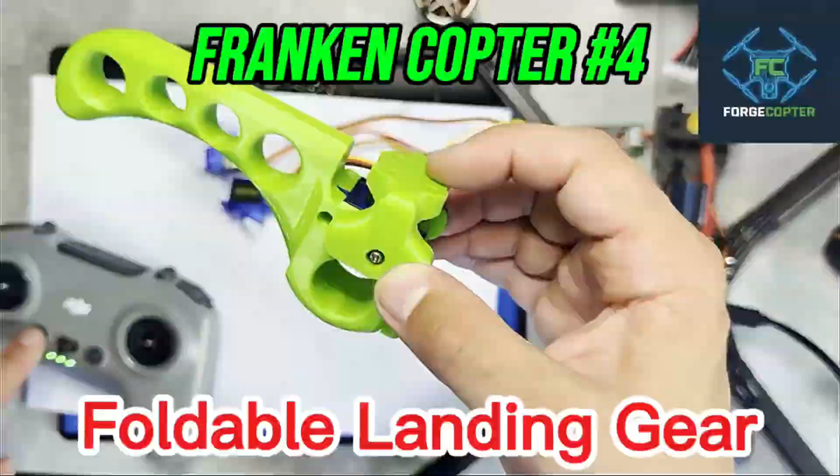I've already shown you how I assemble the drone, how I fought to get it set up, and I got it set up. Today, I want to show you how, from an innocent little project, we move further, because the need to print ordinary landing legs for the drone turned into a project worthy of ForgeCopter.

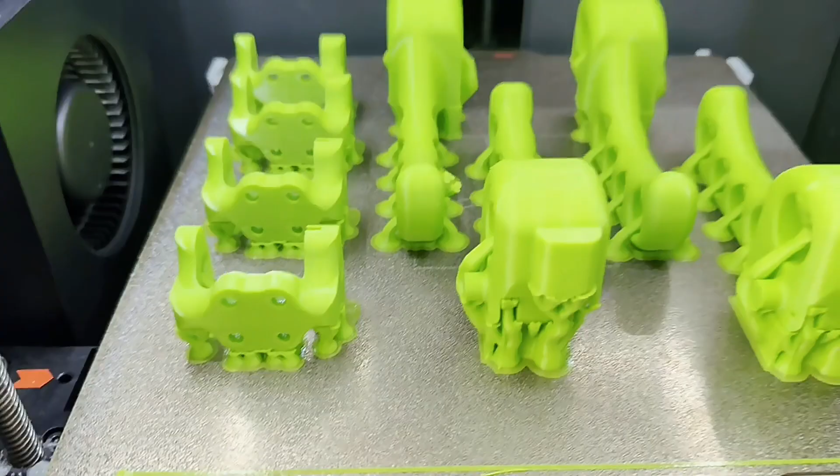Welcome to the video. I'm assembling the first legs. Even then, I had mixed feelings about them. They looked okay, but something felt off, too delicate, too temporary, and I was right.

While tuning the PIDs, I simply broke them. The drone is shaking, the legs take the force, and the plastic says bye-bye. Classic story. I had to do something about it.

I start looking for ready-made solutions. Google, checking images, but they're all the same cookie-cutter stuff. 3D model platforms, but those models are for much smaller drones. Wood legs, I dig through dozens of projects. Seem cool, but it's like something from a racing drone, not from a machine that's supposed to actually work in the field. Nothing fits the Franken-copter.

The conclusion was simple. Since I didn't find anything worthy, I'll design them myself. I open SolidWorks. I start drawing.

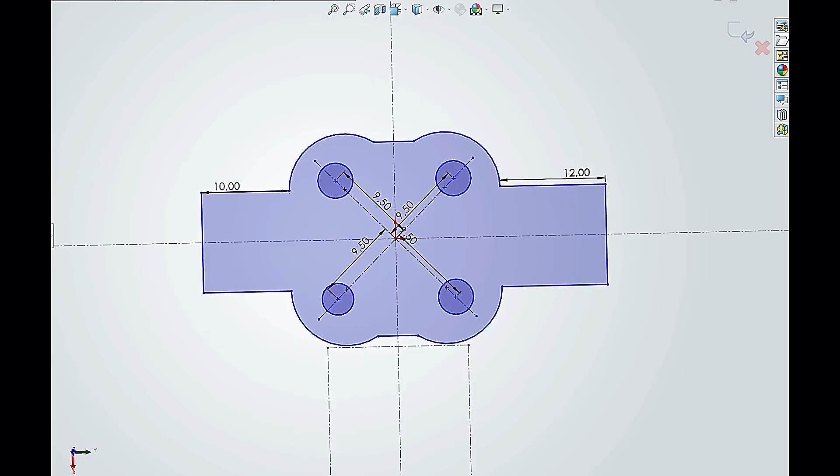The first versions were, to put it mildly, mediocre, too complicated, too heavy, or just plain stupid. After a few attempts, it suddenly clicked. Since this is FrankenCopter, the legs can't just be ordinary blocks. They have to fold and unfold by themselves.

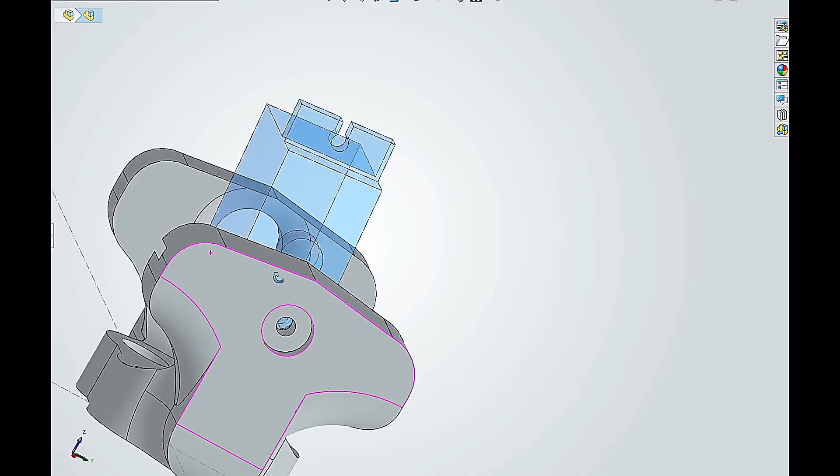Decision made: servos. In the cupboard lay some old SG90s from other projects. They're pretty weak, that's a fact, but they're light. They should manage. On top of that, I designed the legs so that even in the folded position, it already builds ground clearance.

So I don't always have to unfold them. Sometimes it's enough that they simply are there. Folded clearance is about 5 centimeters. Unfolded, 13 centimeters, exactly as much as needed.

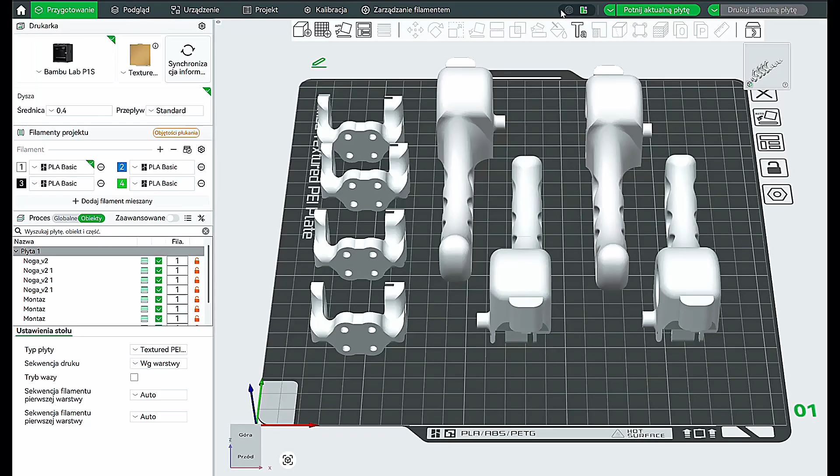The models go into the slicer. I set everything up, generate the G-code, and an 11-hour print begins.

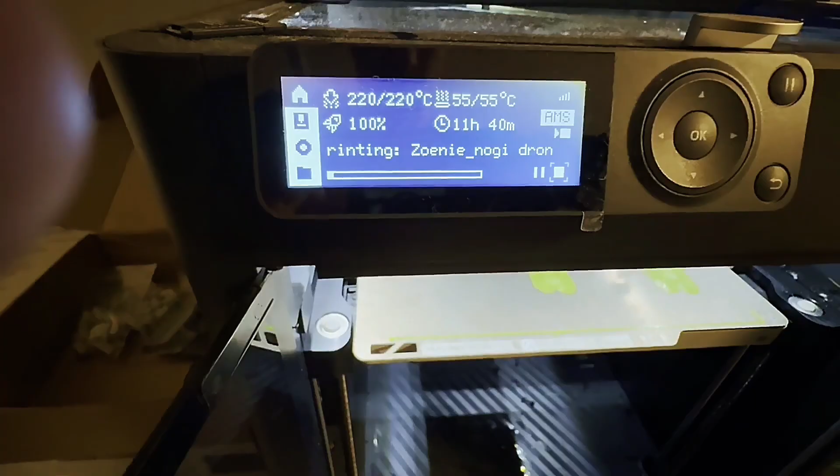The first layer looks good, so I leave the machine and go to sleep. In the morning, I get up, there's still over 2 hours left. I must wait. The print finally finished. No errors visible at first glance, so time to get to work.

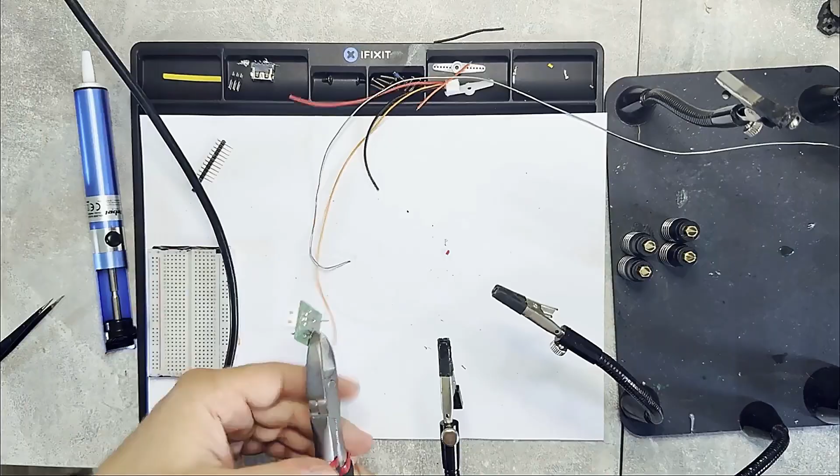This started by assembling the hardware. All of this had to be soldered somehow. At first, I wanted to mount the servos directly on the flight controller, but that's not the best solution, because servos need current right from the start, and a flight controller usually only has 2, maybe 3 amps on its 5-volt pads.

So I started building a setup that allows connecting the servos and power from a separate power supply. I had a few power supplies, but unfortunately from Chinese manufacturers, so it was hard to judge their efficiency. Unfortunately, I was stuck doing the work without a predictable outcome.

On top of that, the concept kept changing. First, I wanted each servo to have its own signal wire. Then I realized that one signal cable to the FC is enough, because the servos will open the same way.

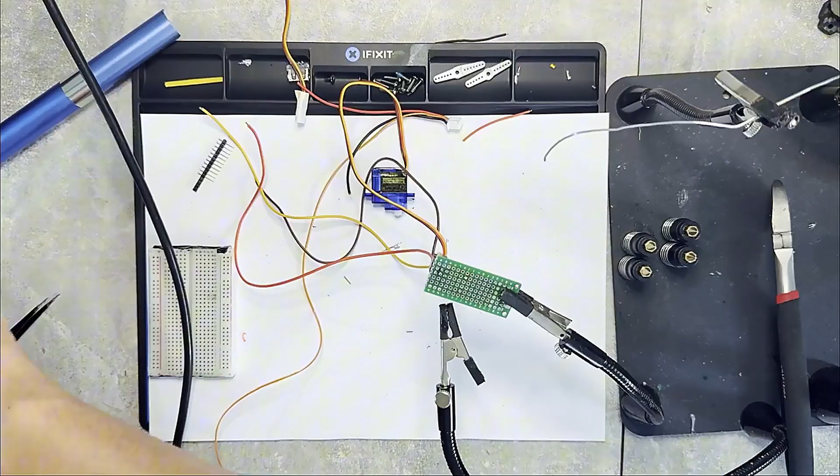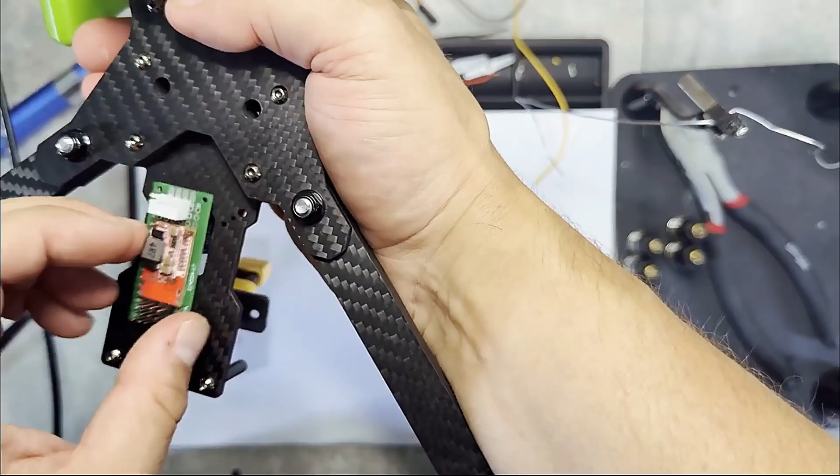I wanted to do everything professionally with connectors, after all, YouTube is watching. But connectors add weight. On normal drones, let's say under 7 inches, that can be a problem. But the bigger the drone, the less of an issue weight becomes, because the batteries themselves often allow flights over 30 minutes, and that's already a solid result. My motors are strong enough that 100 or 200 grams difference doesn't matter to them.

I treat the Franken-copter as a prototype drone. It has to fly, but I care about its modularity, so it can be a base showing that you can build drones based on ArduPilot, where the drone is meant to be more useful than just doing tricks for fun.

That's what Betaflight is for. As you can see, it's roughly soldered. Time to check if it works before I mount it.

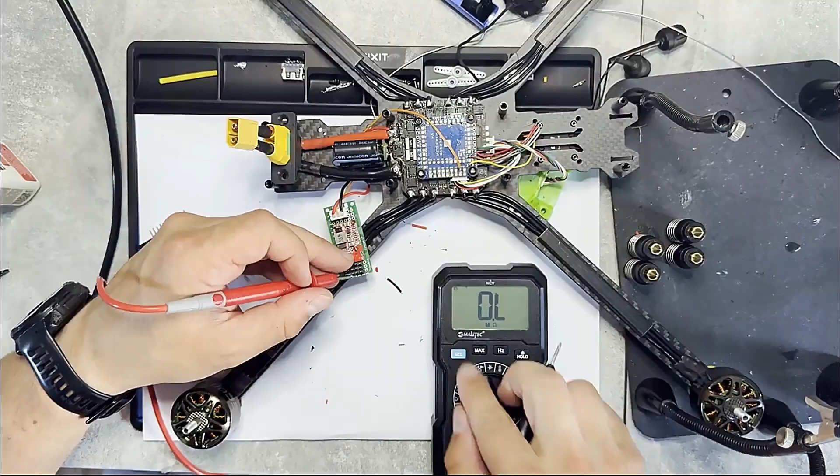All right, in ArduPilot, there's this thing called Landing Gear. It's a tool that lets you manage the drone's legs so the undercarriage can extend and retract when needed, and in some flight modes, it even happens automatically. So it seems like the perfect solution not only for Pixhawk, but also for my Matek.

I fire up Mission Planner and first go to the channel settings of my controller to check which channel is responsible for the C1 button. Okay, it's channel 9, so that one will handle folding and unfolding the legs.

First, I assign the landing gear function to the S12 pad on my FC, so the signals from the FC should send PWM with the correct servo positions. Then I set the maximum and minimum PWM values for that pad according to my RC values.

Now it's time to tell Channel 9 what it's responsible for. The point is that at this moment, only the FC knows that something is happening, but it doesn't know on what basis it should work. So I assign the landing gear option to the control channel.

Unfortunately, that's still not the end of the setup because landing gear requires activation, after which additional settings appear, like, for example, the retract and deploy height, the trigger method, or the current status of the legs.

Okay, time for a test. In messages, I should see a message about the legs being retracted or deployed, so I press the C1 button and it doesn't work. I check whether the button is even sending status, and it's fine.

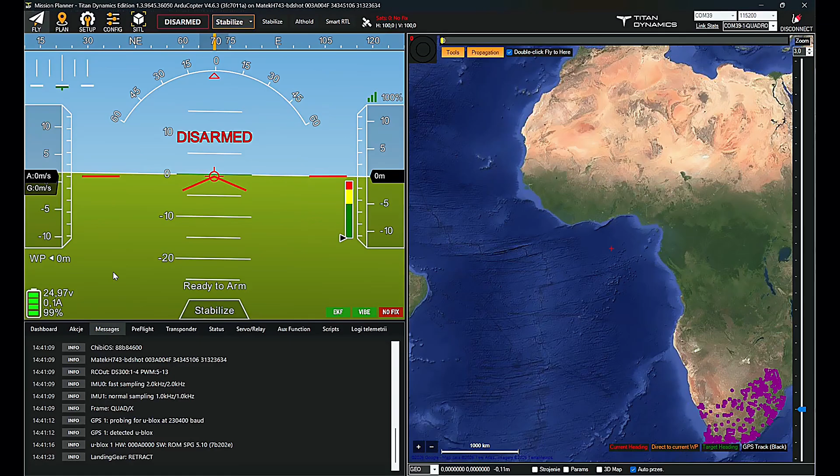I did a few more attempts, and it turned out, well, AI finally made me realize that landing gear has native value settings for this function, and my channel 9 working at a minimum value of 1,495 is too high for the servo to return to the previous state. Simply put, the value is too high for ArduPilot. So either I change the button to one with a lower minimum range, or it just won't work.

Okay, so I abandon landing gear and go for standard servo control. In Servo 12, I change its function to the value from channel 9, save, do a restart, and it works. The servo moves both one way and the other.

Now the remaining issue is the proper range because it's working part-time. My switch operates in a range that doesn't allow the servo to open properly, so S12 has to scale the readings from the controller so I can use the full 180 degrees of my servo's travel, and also changing the PWM level values to increase the operating ranges.

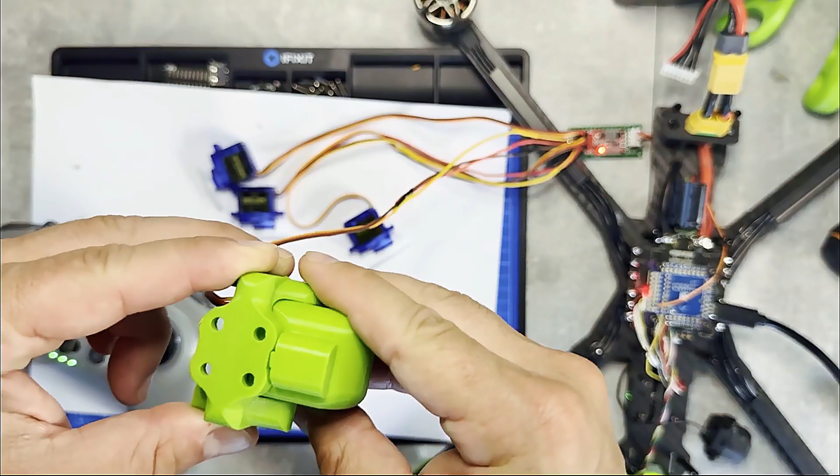Time to check how it works, and it's so-so. To improve it, I made changes live in the servo configurator. Now it works pretty well, so I'll mount the servo in the leg, and before mounting, I'll check if it works properly, if there aren't any big resistances. Okay, the servo reacts, opens, and closes quite nicely.

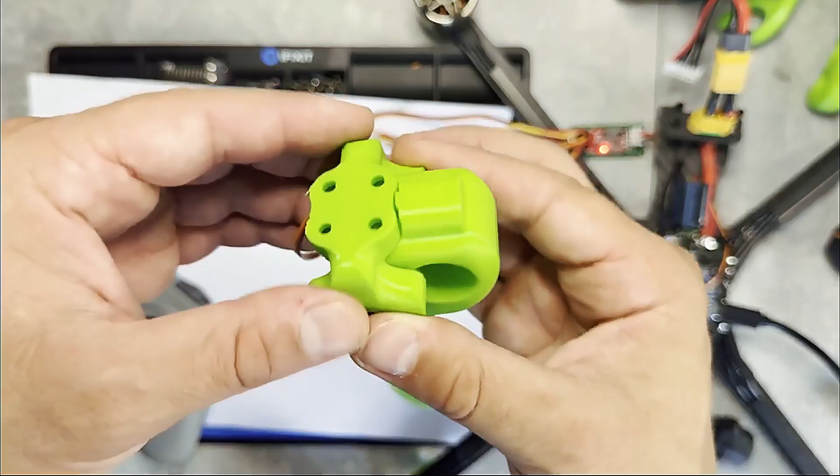I'm probably most proud of how well the parts fit together. It looks really good. Of course, these servos are quite delicate, so this won't work under load. But at this moment, that's not what I'm after. I want something that will allow safer takeoffs and landings with the drone, and as you can see, this system can be quite interesting. I suspect this won't be the first version.

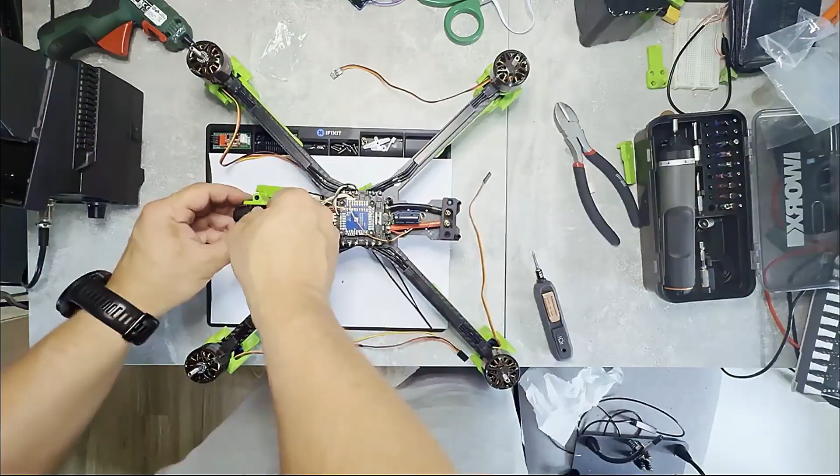Time to move on to mounting. Here, I'm changing the mounting screws to longer ones because to make the base of the legs stronger, I gave them a bit more material. I haven't seen projects where builders do this kind of solution, probably exactly because most projects are about building drones for fun or filming breathtaking shots.

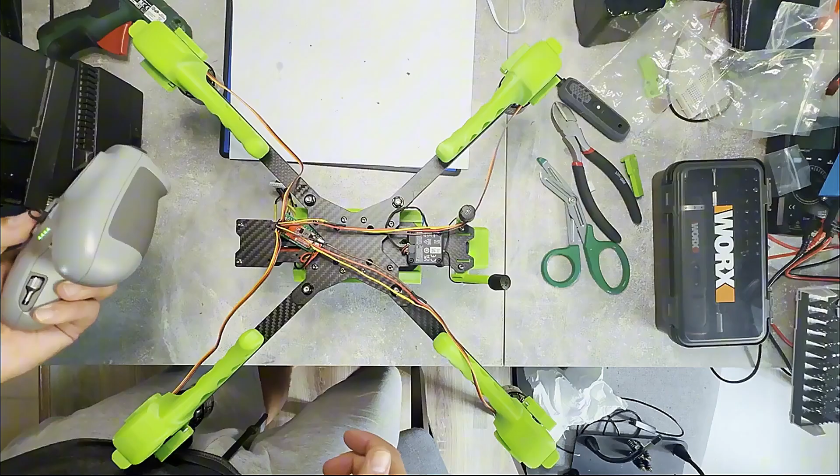Okay, everything is assembled, time for bench tests. Everything fits quite tightly, but I'll plug it in right here in a moment. I just want to check whether the intended effect has been achieved, and I press C1, and it doesn't work. Maybe I connected something wrong, need to check. And boom! And does a carbon frame conduct electricity?

Oh yes, but I had a short circuit, a flash and smoke. What the hell just happened?

This is an episode from the Don't Try This at Home series.

All right, I cleaned up. Luckily, the FC is intact and the power supply too. Basically, no losses, but I had to change the concept.

My servos come from different periods and different manufacturers, and it's impossible to set them so that each one opens the same way, and that's because this is FrankenCopter. Let me introduce you to this beast.

This is the ESP32-P4 Wi-Fi 6. It has a dual-core processor at 400 megahertz, plus another 40 megahertz processor if I ever want to use it in low-power mode, and a C6 module that allows communication over Wi-Fi or Bluetooth. It's overkill for this project, but I intend to use it as a companion computer, and I have some pretty interesting plans for it. So watch the next episodes because things are going to happen.

As you can see, I soldered it modularly. Because I'm going to develop this in the future, for now it's like this.

Previously, I had concerns about the power supply. They turned out to be justified, and when I connected power to the drone, the power supply for the servos couldn't handle it, so I changed it to a bigger one. This one is already rated at max 5 amperes. I also changed its original connector to one that suits me better. The point is that I can easily connect individual elements or modules together.

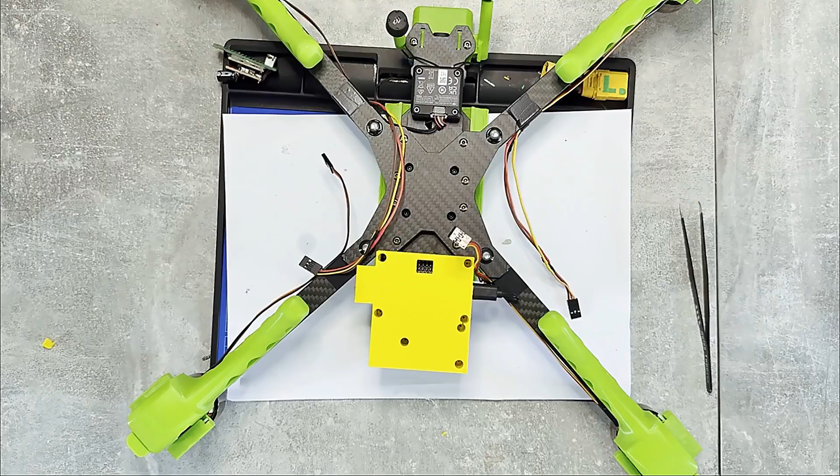To give the whole thing some aesthetics and to arrange it sensibly on this frame, I designed a housing. I screwed it to the frame, and now I'm connecting the next servos. Here, the YouTube magic is working. It looks simple, but seriously, I spent several hours figuring this out.

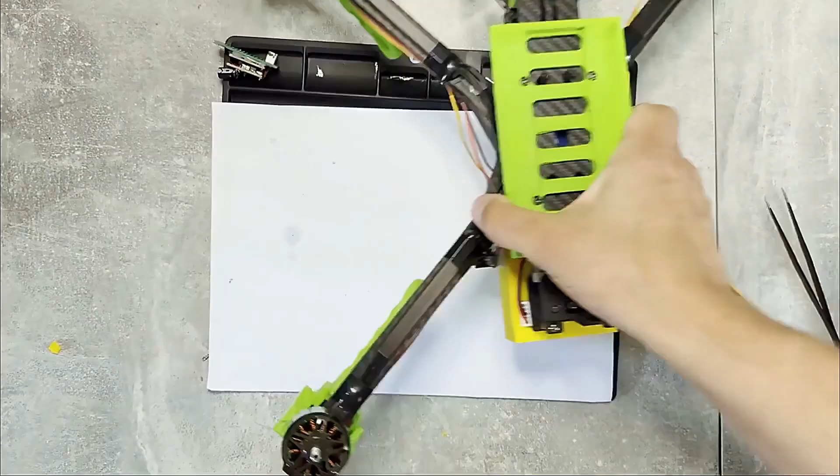Time for the first test. I just wanted to check if everything works properly on the drone. I folded and unfolded the servos several times. At the beginning, in Alt-Hold mode, the drone had to catch the proper hover, but the effect is something to admire.

Now the Franken-copter has retractable landing gear.

Of course, I couldn't stop at just one test, so I went to a buddy's place where I could calmly fly over the Polish fields during harvest time. The takeoff went elegantly without the slightest problems. I was a bit worried how it would be during the flight, but it turned out well, and after 30 minutes I came back, deployed the legs, and landed, although I was wobbling a bit out of fear that I'd hit something.

From the people watching, I only heard instructions. Left, right. No, that right.

We have it. Another element of the drone finished. In the next episode, I'll deal with optical flow. So you're invited.